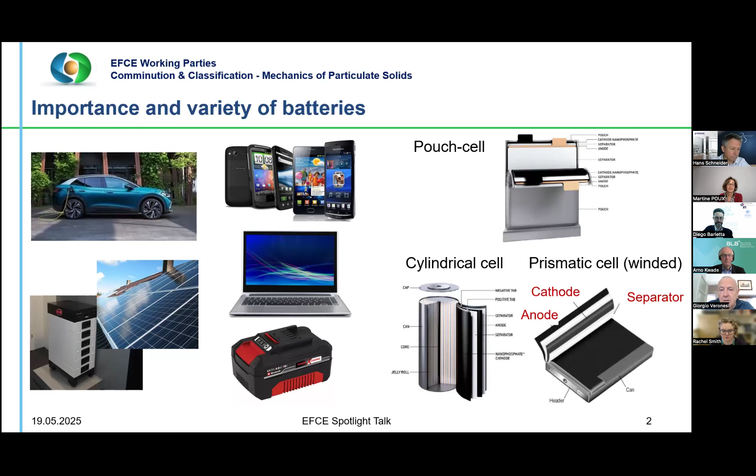Among various battery technologies, lithium-ion batteries have garnered significant interest due to their high energy density and extended cycle life, making them suitable for numerous applications, particularly in portable electronics and electric vehicles. The fundamental operation of LIBs relies on the reversible movement of lithium ions between the anode and the cathode. Let's have a look at the structure of the battery compartment and its main components.

The primary anode material is graphite, typically with a particle size around 20 microns, exhibiting a layered structure that facilitates lithium-ion intercalation. Silicon, with nanoscale particles below 150 nanometers, is explored as a high-capacity alternative. Common cathode materials include lithium nickel manganese cobalt oxide (NMC), often with particle size around 500 nanometers, known for its high energy density, and lithium iron phosphate, which can have varying particulate forms, including nanorods of 30-50 nanometers or larger particles around 3 microns, valued for its safety and cycle life.

Conductive additives are also incorporated to enhance the electrical conductivity within the electrodes. Carbon black forms a conductive network consisting of spherical aggregates with primary particle size ranging from 10 to 500 nanometers. Carbon nanotubes, one-dimensional nanomaterials with diameters of 0.5 to 80 nanometers and lengths of 5 to 20 micrometers, provide efficient electron transport pathways.

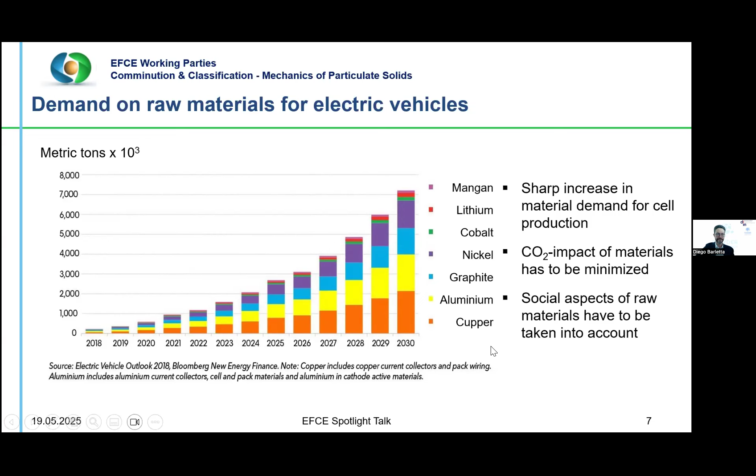I'm sorry for that, one second. It was too fast in clicking.

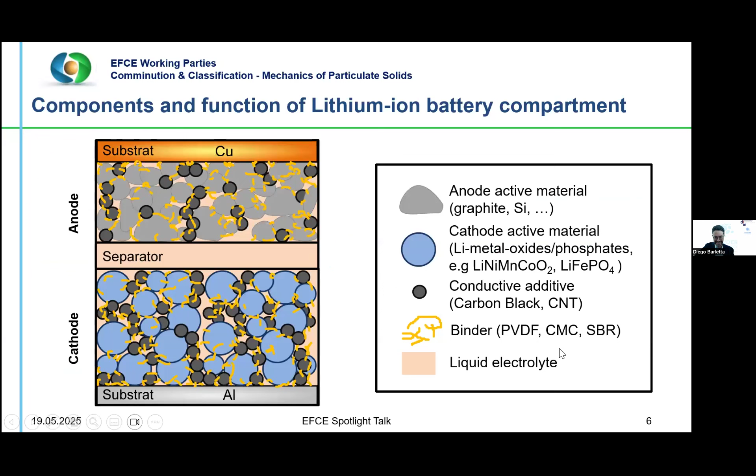Okay, that's it. The development of a circular economy for batteries necessitates research and development in particle technologies across various stages: mechanical recycling of end-of-life batteries and production scrap by optimizing physical processes for efficient material recovery, and hydrometallurgical treatment and reconditioning of spent active material by developing environmentally benign chemical processes for metal extraction and reuse.

Also needed: synthesis of active and passive materials by tailoring particulate properties for enhanced battery performance through energy-efficient synthesis methods; raw material handling and mechanics by addressing challenges in powder flow and processing for consistent electrode manufacturing; and energy-efficient production of tailored electrodes by developing advanced slurry processing and dry coating technologies for uniform, high-performing electrodes with reduced energy consumption.

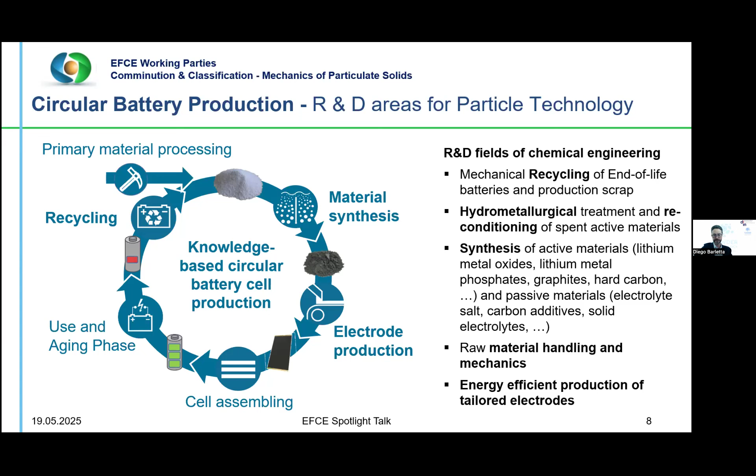So today we will shed light on some of these aspects of particle technology that are relevant to this type of production. And so we have a program of three talks.

The first will be given by Professor Arno Kwade on powder technology-based innovation of modern battery electrode production. The second by Professor Rachel Smith on linking process, structure, and performance for lithium-ion battery electrodes. And the third one by Dr. Hans Schneider on key processing steps in dry battery electrode production, dry mixing, and powder handling for film formation.

You have already seen the structure of lithium-ion batteries with the anode and the cathode, and what is important to say is that this structure is very important for the performance of the battery cells, and I think especially Rachel will talk about that later in detail. But to say that you can see the porosity or the pore distribution, the distribution of the binder and carbon blacks within the electrode, they are very decisive for the electronic conductivity.

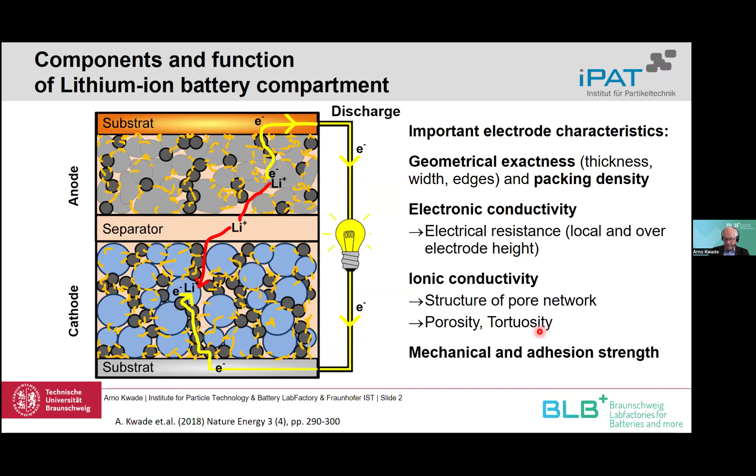And also for the ionic conductivity, both have to be in a certain range so that the cell at the end has good performance regarding fast charging, for example, but also energy density and lifetime, where mechanical and adhesion strength is a factor. So here are some of these quality values like energy and power density, lifetime, safety, sustainability, and costs. These are all goals we have to achieve for modern and innovative electrode production.

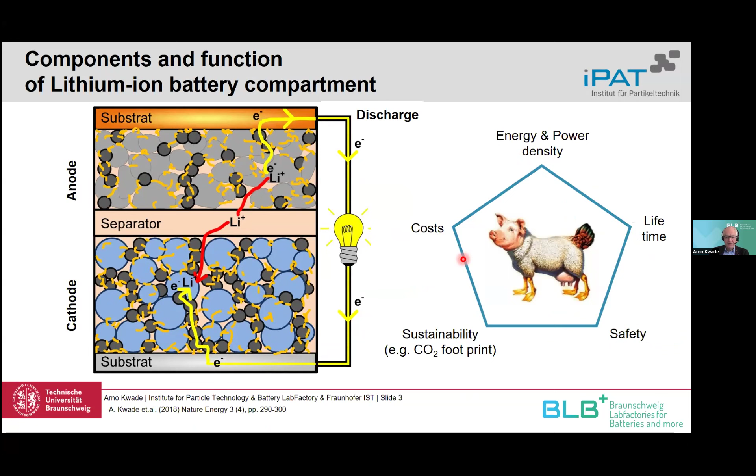In Braunschweig, we are running several labs for this purpose. We started with a big lab in 2014 as a joint lab, working together with 17 other PIs from different fields, from electrochemistry, electrical engineering, up to economics. We are working on the entire topics and have this great production lab with a dry room, which is very decisive and important for producing battery cells.

We also have a diagnosis lab where we dismantle cells and have a closer look at what happens during operation of the cell. We have a new circular lab where we operate a recycling plant and have large facilities also for electrode production. And we will start an education lab for our students, but also for industry, all along this very important circular production, as we call it.

And you see what Diego has already shown, that there's a lot of potential for chemical engineering in the material synthesis, in the electrode production itself, but especially also in the recycling field.

Now coming to my talk in detail, after the introduction I will come to how we can improve the state-of-the-art electrode production, and then I will go over to the dry electrode production, which is also the topic of our third presentation in detail, before I come to a conclusion and an outlook.

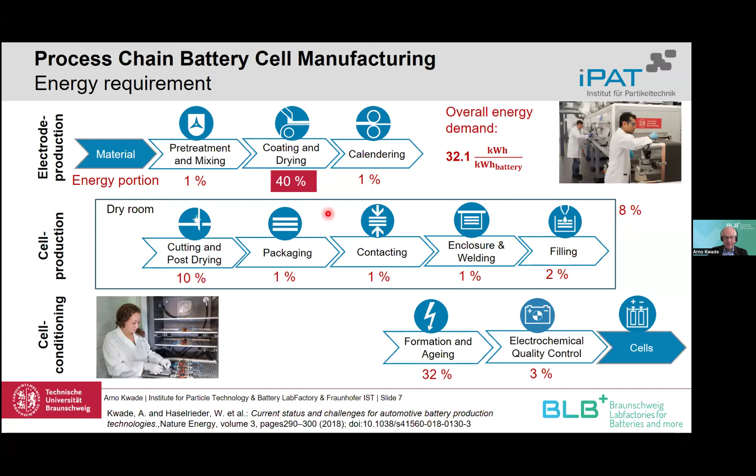And then also the post-drying needs some energy, and also the operation of the dry room. You see that these are very crucial steps, especially for sustainability, so we focus on these steps a lot.

Going a little deeper into the process structure and performance relationships, we can have a closer look into the electrode. You see the electrode can have a certain thickness, density and porosity, mechanical strength, and wetting behavior by the electrolyte - all important for later performance, and it all depends on the particles themselves, but also on the microstructure of our electrode.

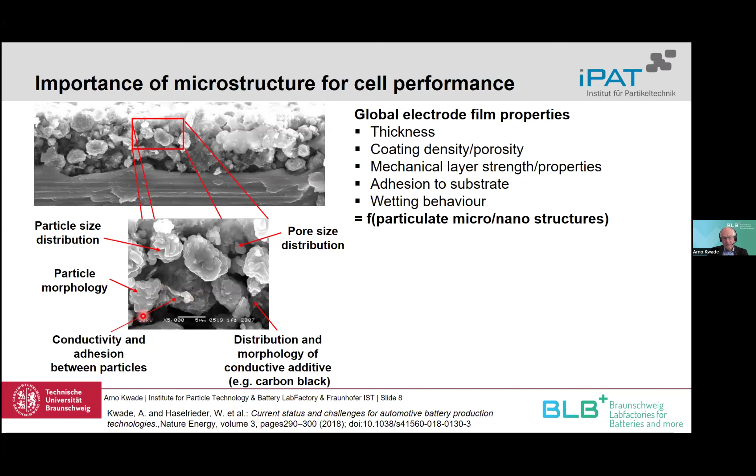Now coming to the process of electrode production, as I mentioned, we have dry mixing, wet mixing, a coating and drying step, and a calendering step.

Let's first look at our quality parameters, the structure parameters along the process chain. For the dry powder mixing and the wet suspension, at the end we can measure particle sizes and particle morphologies as a disperse parameter.

For the later electrode, we can measure the pore network structure, such as pore size distribution. We can also determine the tortuosity, which is the length of a path through the electrode for the ions, and this should be as short as possible.

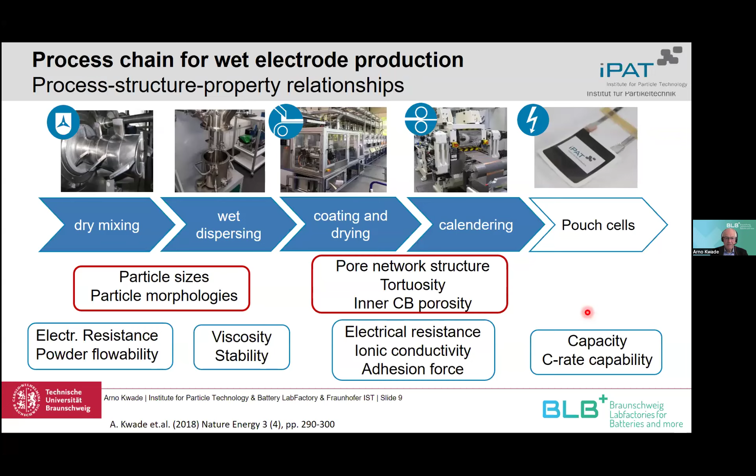And then finally capacity, C-rate capability, fast charging capability, etc. of the cells. So now, focusing first on dry and wet mixing, our task is to disperse the conductive additives. I'll focus here on carbon black, but today CNTs—carbon nanotubes—are almost always included in electrodes too, and dispersing them is also very crucial.

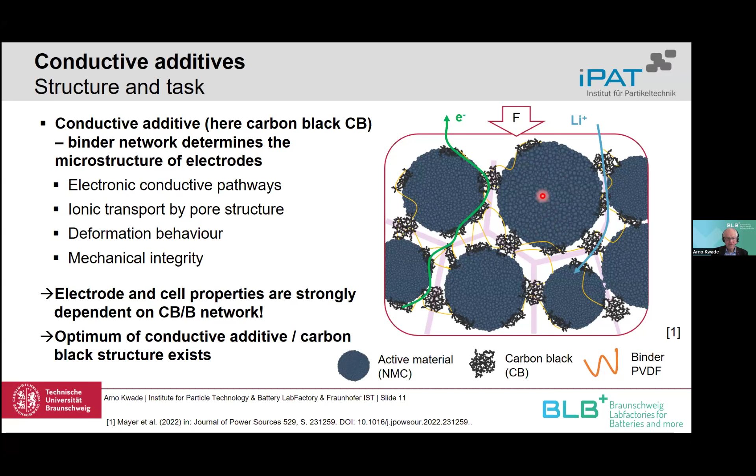As I said, the inner carbon black porosity is a good measure for the structure. It's also the case that the smaller the agglomerates, the smaller the inner porosity, because the agglomerates break where the porosity is largest.

We calculated this inner carbon black porosity using normal mercury intrusion measurements. We could also show that the ionic resistance really depends on this carbon black porosity, and there's a minimum in resistance, meaning an optimum at a certain carbon black inner porosity.

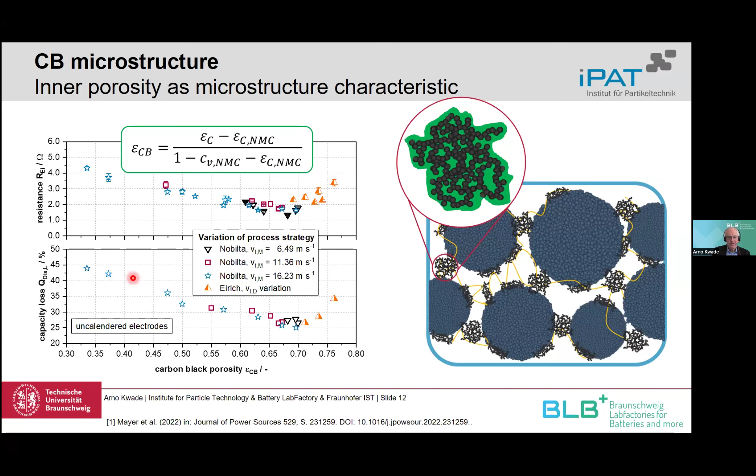But we're looking for another parameter which we can use for quality control during processing, especially during the dispersing of particles. It's not so easy because you have bimodal distributions of the carbon black.

The active material shouldn't change—otherwise you get degradation—so we have to measure the carbon black specifically. We defined a way to measure the carbon black distributions using centrifugation and laser diffraction measurements.

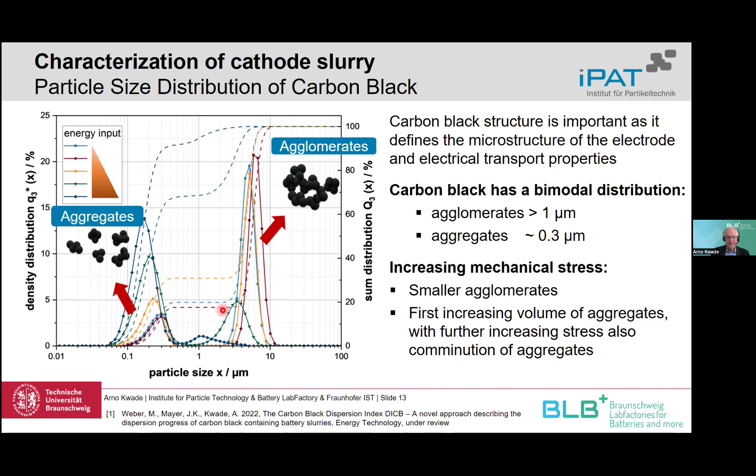We're looking for one parameter that can characterize this performance, and we found that the enveloping surface of the aggregates is a good measure. We can estimate a characteristic value by calculating the relative amount of aggregates—the area under the left curve compared to the entire curve—and the median diameter of the aggregate. We multiply the amount by the specific surface of these aggregates, giving us a measure we call the dispersion index.

And now I want to show how this dispersion index is affected by the dry and wet mixing process.

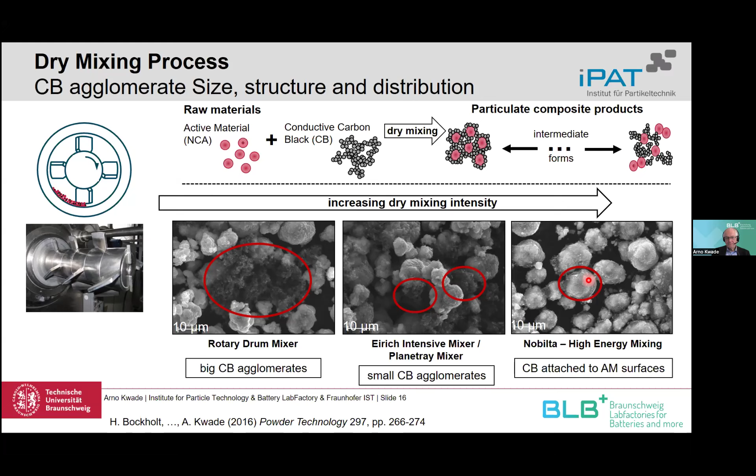If we have a high intensity mixer, then the agglomerates are much smaller. Already the first aggregates are sitting on the surface of the active material particles. In an extreme case, we really coat the active material particles with the carbon black, which is maybe too extreme, but you can see that later. So something in between is what we need at the end.

And also we can reach much higher values, at least in a reasonable time. This is due to the disagglomeration of the carbon black agglomerates into aggregates.

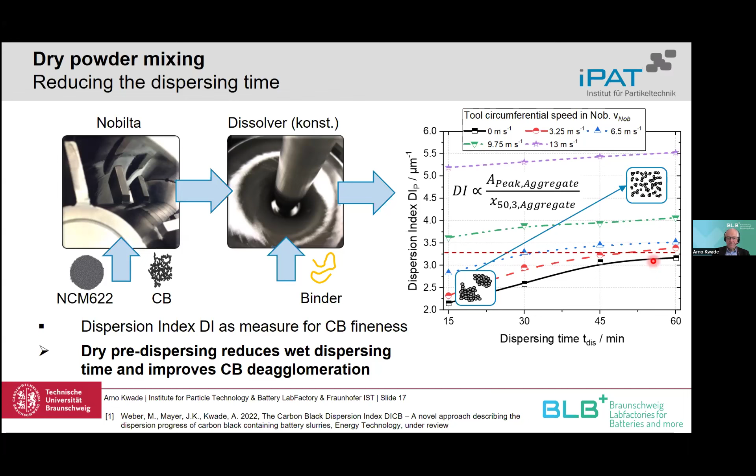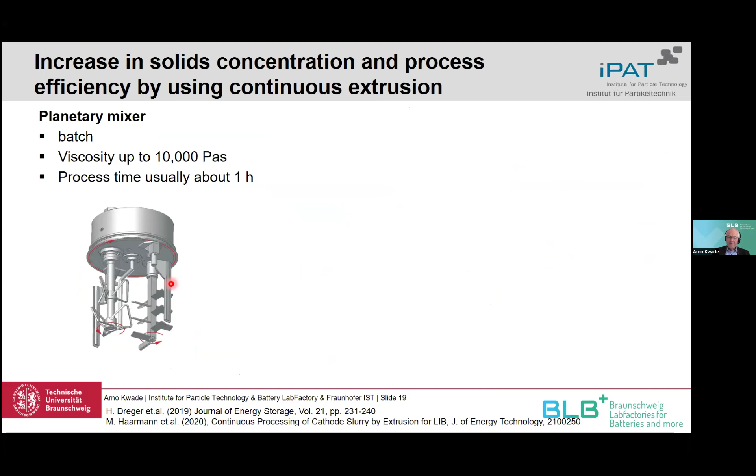For the wet dispersing, typically you use planetary mixers, which have been around since they started to produce lithium-ion batteries, and they are used in 90% of the gigafactories in the world today. But there are other solutions, and the most promising one is extrusion.

Extrusion is a continuous process - we don't have several batches. We can also operate at much higher viscosity. You see here we have viscosity up to 10,000 Pascal seconds, but we can also go up to 100,000 Pascal seconds with an extrusion process. The mean residence time can be very short, which also helps, especially if there might be some side reactions. But we have to control this process very nicely because we can't change anything after the product left the machine.

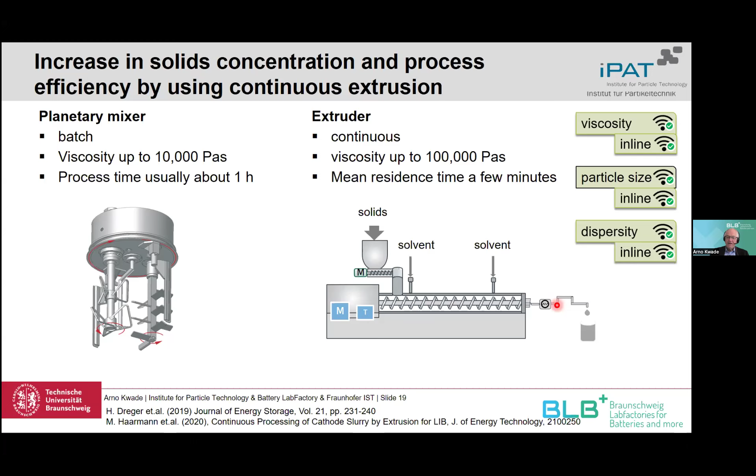Now what happens in the machine: if you look into the screw design, we stress the particles due to shear inside the suspension. We can measure or describe that by the so-called stress intensity, which is nothing less than the shear stress inside our extrusion machine. As a measure of that, we can use the torque or the specific torque of the machine.

Besides that, we have to see how often such particles are stressed, at least in the volumes where we have really high stress intensity, especially where these two screws are coming together. If we multiply both, then we have a measure for the specific energy input into the process.

What we can see is if we have low stress intensity, then we have still a higher number of agglomerates, lower number of aggregates. If we increase the stress intensity with the same comminution or dispersing time, then we have lower and also smaller agglomerates - lower amount and smaller size - but we have much more aggregates formed here.

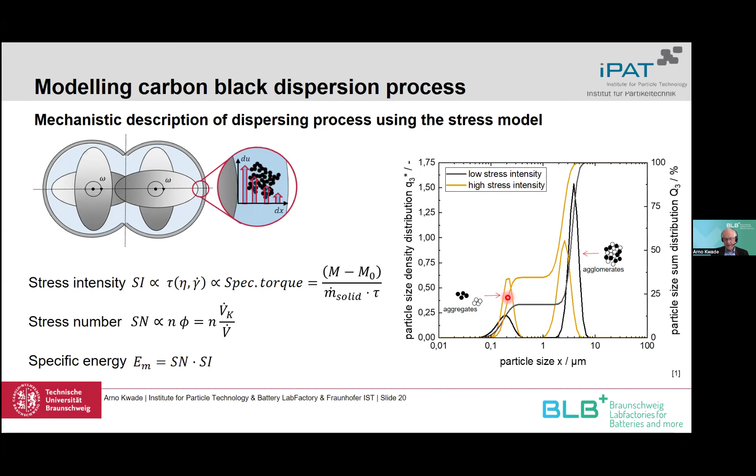Now going to the next slide: if we increase the concentration of our particles, that means we have a high viscosity, very high viscosity within the extrusion, and we have some kneading blocks normally installed in the extruder, then you can see that the dispersion index increases a lot. And we have a really high torque, which then decreases again.

The decrease is due especially to the delamination of the graphite particles. So we have a degradation, which we don't want to see. We can also have this with smaller concentration, but it's only a little bit.

And if we now look at the results, you can see that the results with high kneading, but only 50% concentration, gives us very good or relatively good performance results - that means a high capacity, even at high or reasonably high C rates. 1 C means charging the cell in 1 hour.

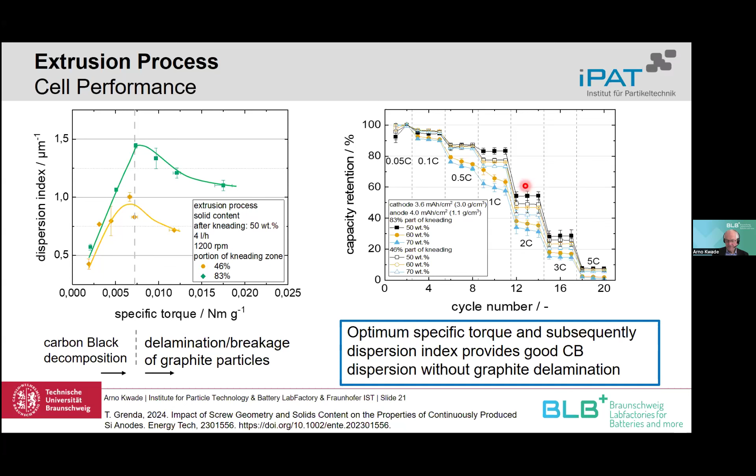If you go to half an hour, then it decreases and so on. But this can also be changed, for example, by the thickness of the electrode or by using more carbon black and CNTs and so on. This is something the companies have to do to find the right performance data.

Now the next step is coating and drying. A lot can be done there, especially to avoid migration, so that binder and carbon black doesn't go to the surface of the electrode. Due to time I cannot go into detail here, but we do a lot of work in this direction.

Then comes the calendering process, which is also very interesting, and we have done a lot of work there too. I want to show only one result. This calendering is really a mechanical compaction of the electrode, to come from bigger spaces between the particles to smaller ones, and to have less volume for the same capacity. That means we can increase electrode density, and by that, the overall energy density.

We can improve charge transfer, especially the electronic transfer, though the ionic transfer usually gets worse. It improves the mechanical behavior—the electrode gets much more elastic, which is good for handling. We can smooth the surface and control the thickness, done by the force coming from the roller acting on the electrodes. Rachel will also talk about this a bit later.

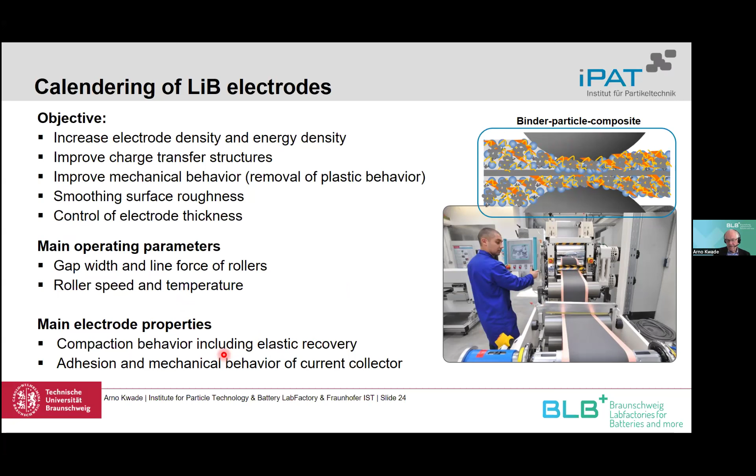There's also elastic recovery, as you may know from tableting, and this elastic recovery hinders our calendering process. One result I want to show relates to what I showed regarding the dispersion or comminution process: the dispersing of the carbon black is really decisive for the calendering process. For small dispersion indexes, where we have a lot of agglomerates, the line load needed is much higher to reach the final result.

This is especially due to the elastic recovery, which is much higher. Then we go down to a smaller line load at a dispersion index of about 4. If we increase the dispersion index further, having almost only aggregates, we again need a higher line load against the elastic recovery, so that we come to the final density, in this case 3.2 grams per cubic centimeter. This was some insight into the production of wet produced electrodes.

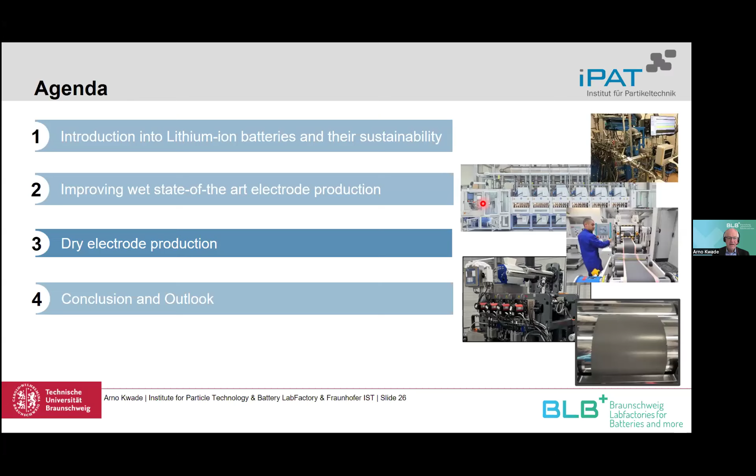Now I would like to come to the second topic of my talk: dry electrode production. As I said, we have to move toward more sustainable production of electrodes, and one measure is to change from wet to dry coating, or semi-dry. I will show you how that works. This also shortens the process chain.

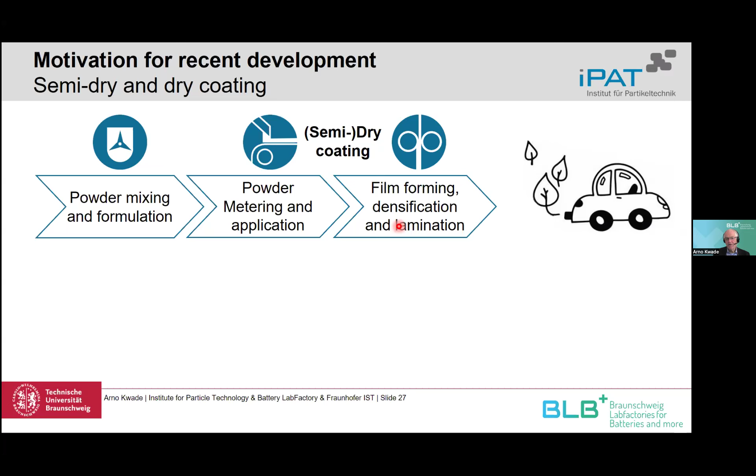We have a more or less dry mixing, then the dosing of the powder and film formation—no drying and no calendering, because the film formation, as you'll see, is at the same time the calendering process. So we have a relatively short process chain. We can also avoid critical solvents, because for example for the cathode material we need NMP as a solvent to work with PVDF as a binder.

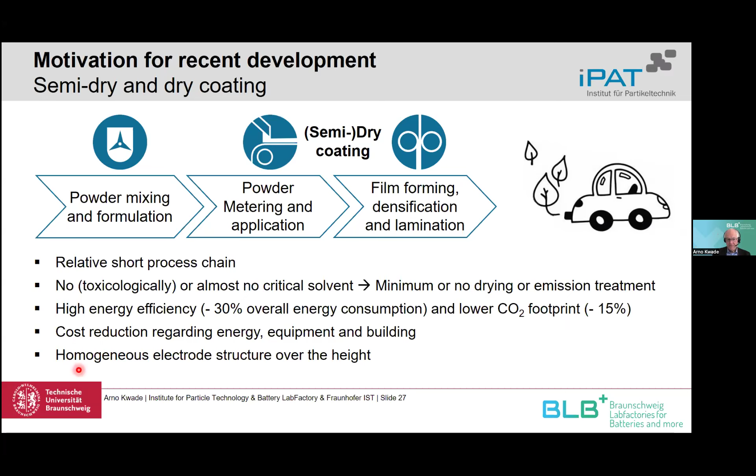We have a much higher energy efficiency, minus 30% of the overall energy consumption. You saw 40% was for coating and drying, but now we need only 10% instead of 40. The CO2 footprint is also much better, and we have a cost reduction, especially because the buildings can be much smaller. Currently, a coating line needs a building about 100 meters long—really big buildings—and this can be shortened to maybe 10 meters with the dry coating process. We also have no migration anymore.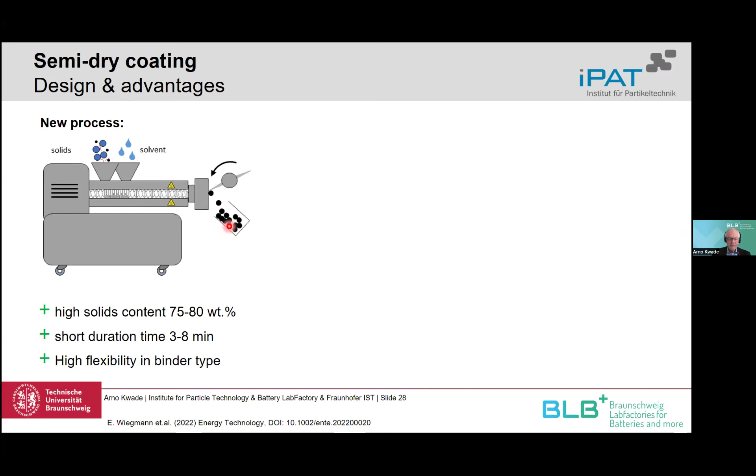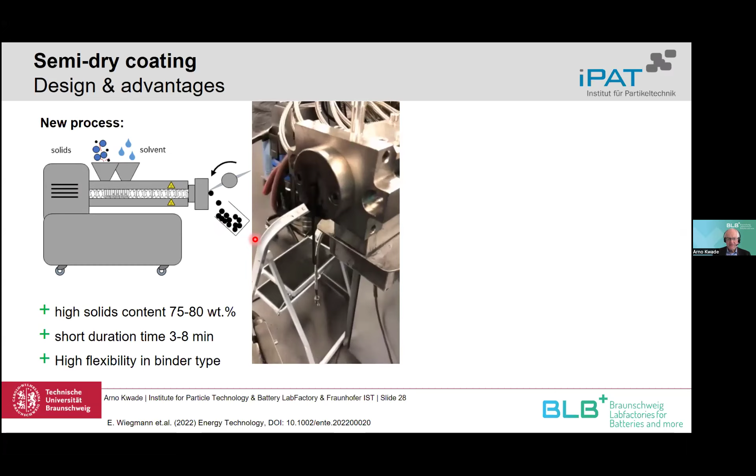To start with the semi-dry coating process, something we developed at our university and also patented: here we produce, by the extrusion process, not a suspension but really granules, which are soft and deformable. Here's a small video showing the cutting of our extrusion strands, giving us nice granules, which we then dose onto a calendering machine. On the calendering machine, we can form a nice thin film with really good properties.

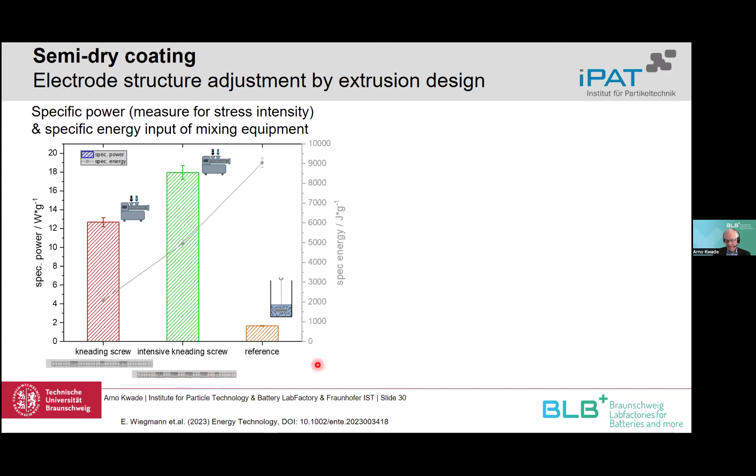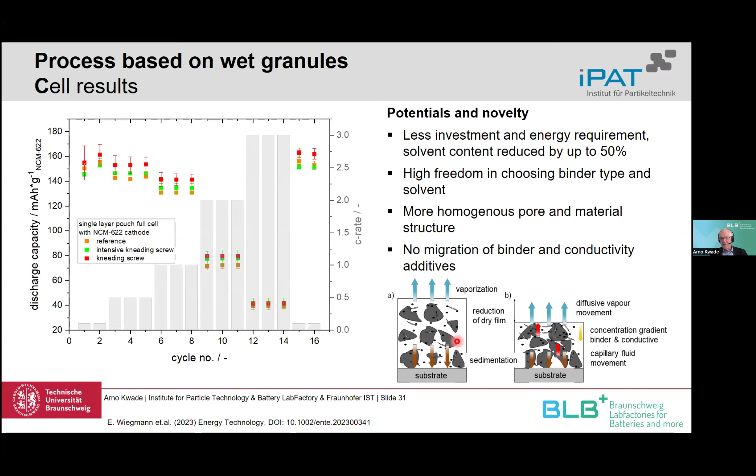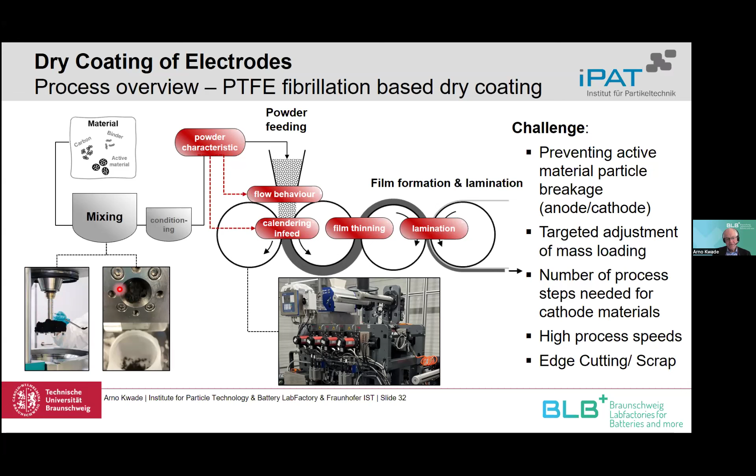So it sounds simple, but it's not that simple because a lot of parameters affect this process. One is the mixing process. We can do it again in a dry process with high intensity mixers from Zeppelin, for example, which you'll see later, or we can also do that with an extrusion process, like I've shown for the semi-dry processing. But I don't want to focus on that today more - I want to focus more on the film building and the effect of the particles.

And the fibrillation of the PTFE depends a lot on the mixing process. For example, in extrusion you can have much smaller and shorter fibrils if you want. In a dry or batch process, usually they are a little bit larger. But there's also an optimum of length and thickness of these PTFE fibers.

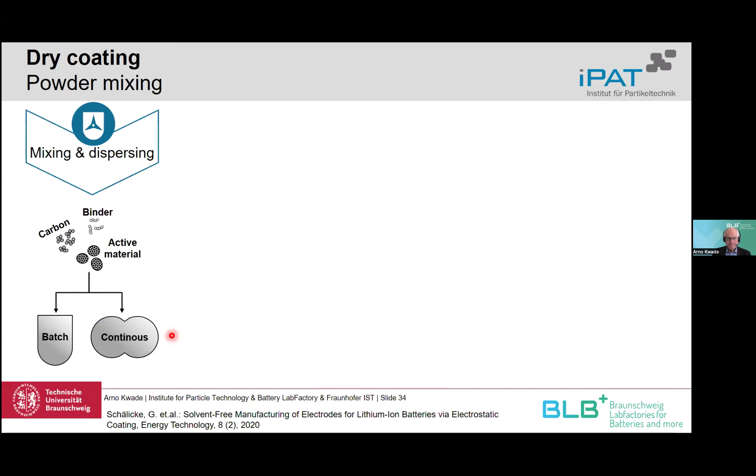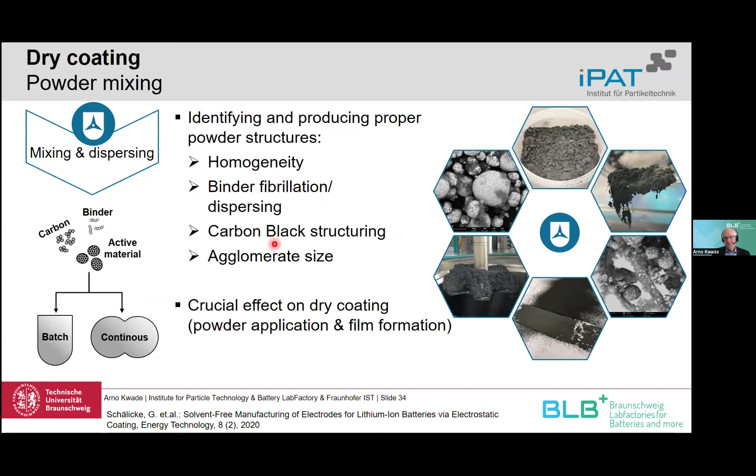Now, this mixing process, as I just said, especially decides or shows the binder fibrillation and determines the binder fibrillation, and also structures the carbon black. It's important to say that in this case the dry process has to do everything - there's no wet process, as I've shown before, that can do more work so you can finalize your structure. That has to be done really during the dry processing, and this has a crucial effect on the coating, but also on the later electrode performance.

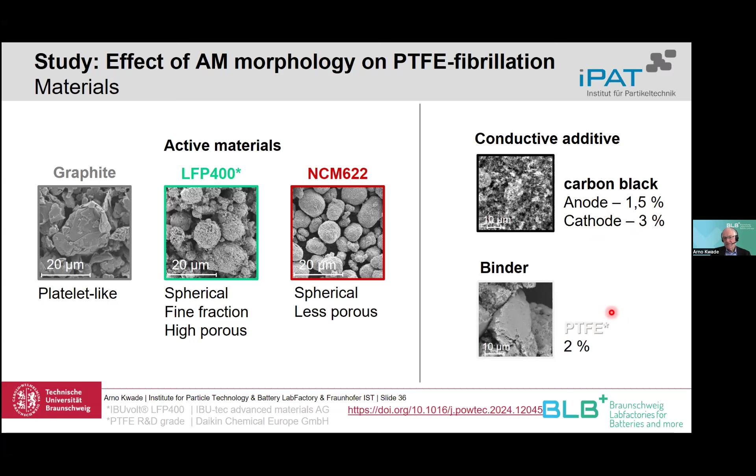And we use some carbon black for an anode - it's 1.5%. For the cathode it's 3%. And in any case we had 2% of PTFE. Now for the mixing process: we first had a starting homogenization of our material at, let's say, high intensities with high power input, kilowatts - so it's the power input.

Then there's a softening phase, and then we come to the fibrillation. Here we add the PTFE, and then we have the first fibrillation of the PTFE, and we take a sample. We have another 10 minutes fibrillation, and afterwards we take sample 4. Then we have a cooling down period without mixing, and a final homogenization at lower temperatures for the final powder properties.

What happens regarding the size distribution, for example with graphite, at the beginning without PTFE there's not changing a lot. It shouldn't be that there's a change, but after adding the PTFE, fibrils formed, and this formed fibrils then also form agglomerates or granulates inside the mixture. This is seen here, and with increasing fibrillation there's an increase in the granulation size and also amount. And after the final...

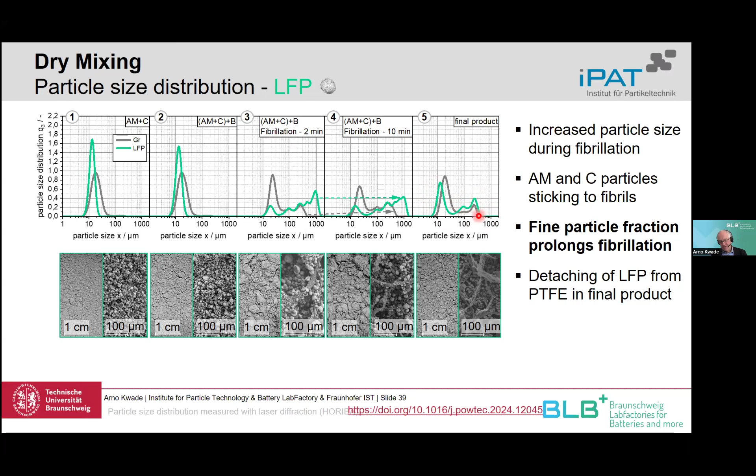So these are the original primary particles which are not granulated, and these are the granules. So we have a mixture out of, let's say, free particles and particles which are detached, which are sitting on the fibrils.

So these are then for the NMC, it's the same. It was very similar to the LFP. And you see that with the graphite, the PTFE slides more than it fibrillates, because graphite has really low friction. And LFP has a fine particle content, which is still there also after fibrillation. And we have a fast process here also for the NMC.

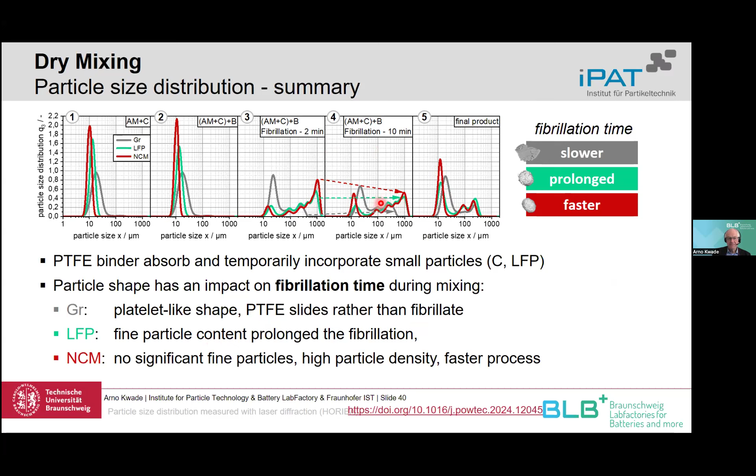What happens now with the properties of our powder, you see, for example, the bulk porosity first increases after fibrillation because you get agglomerates. You can think about that, and after further fibrillation, it changes a little bit, maybe decreases slightly, but there's no big change anymore.

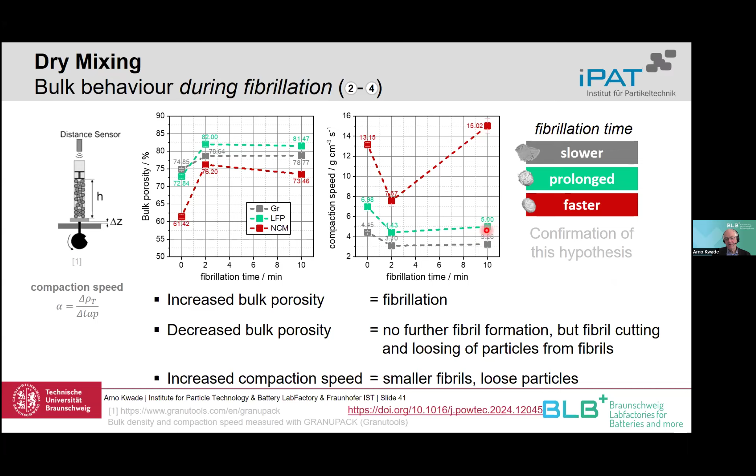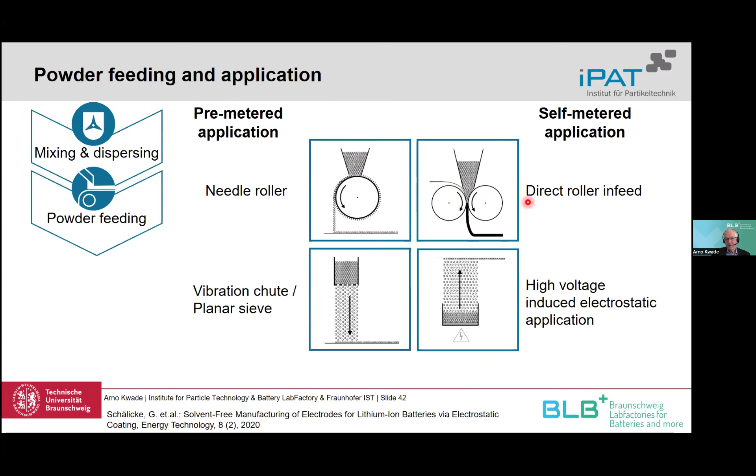Now coming to the dosing process, which is also shown by Schälicke. You see we have maybe a pre-meter dosing, what is not so typical today, but it's also direct roller feeding, which is the most common one.

And what I wanted to show you here is that we have a two-roll calendaring process, for if we dose it onto the current collector, or we have the several steps through the calendaring machine.

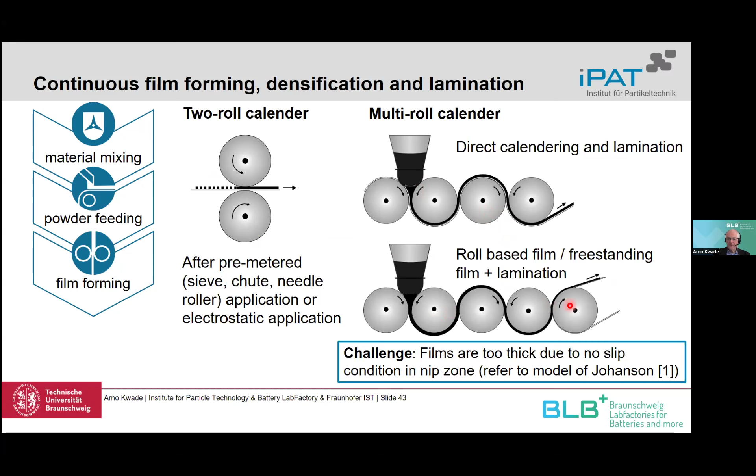And I think there are two production processes which are typical. That's the Maxwell process, where we have a freestanding film or roll-connected film, and we need several steps to come to the right thickness, and then we transfer it onto a substrate.

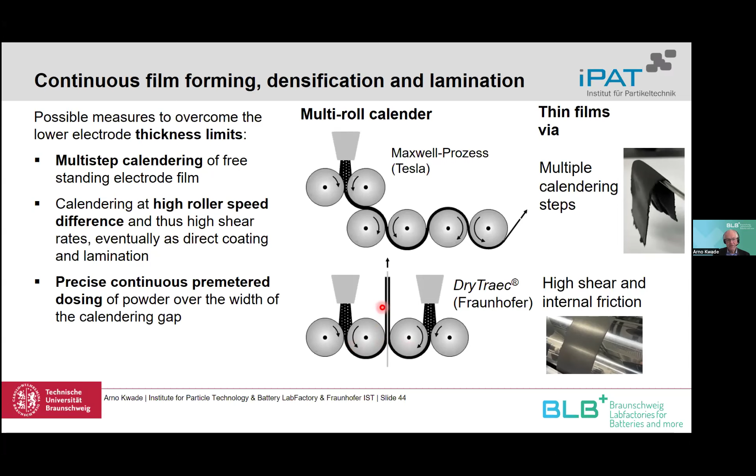And there's another DryTraec process where we have a high differential speed of the rollers, and by that we come down to very thin layers already, and then we can directly laminate it to the collector. To show how that looks like, you have the powder here, you get a sheet, and by several densification steps, in this case 3, we get a nice film, which is really mechanically stable and can be then transferred further. The question is how we can describe that.

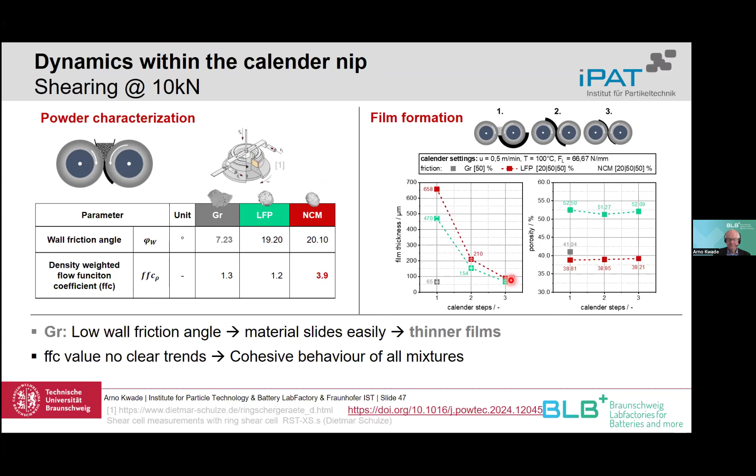A much better measure is the uniaxial compression. What I want to show here very shortly is that with this measurement, you can predict almost, if you know the line load in the calendaring machine, what will later be the porosity of your layer.

What is shown here—my computer is very slow at the moment, but you can maybe see where the straight line goes down. That is what we get at the end.

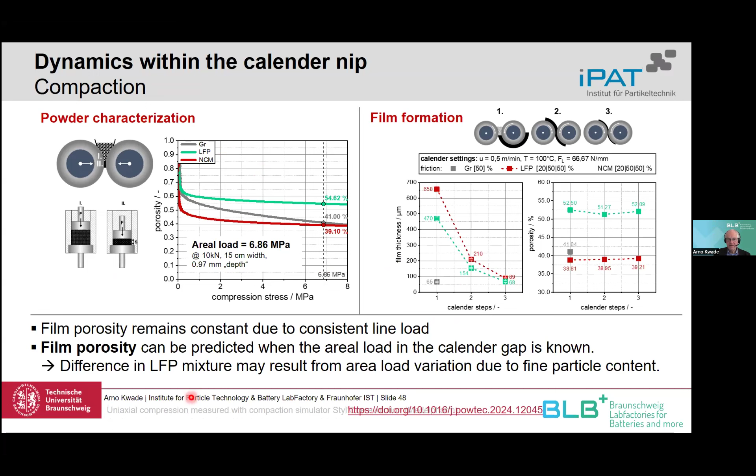Now coming to the conclusion, I hope I could show you that we have material, process, structure, property, function, which are really decisive for the later performance of the cells. We need energy and cost-efficient production processes.

We have to model and predict the input of the conductive additive structure. And what Rachel will show is how we should develop digital twins of the process, and also how the structure determines the later performance. And very important, what Hans will show is the handling and dosing of dry powders for the semi-dry and dry processing of all our electrodes.

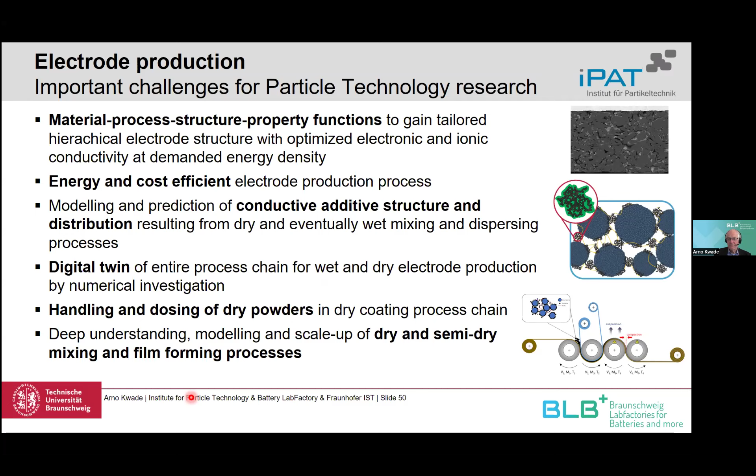I think there are a lot more topics for chemical engineers too—the synthesis of the particles. I think we can do so much there in this field. Then also, if we come to solid state electrolytes and solid state batteries, we have no liquid electrolyte anymore. So even more particles and even more mixing, and the structure is important.

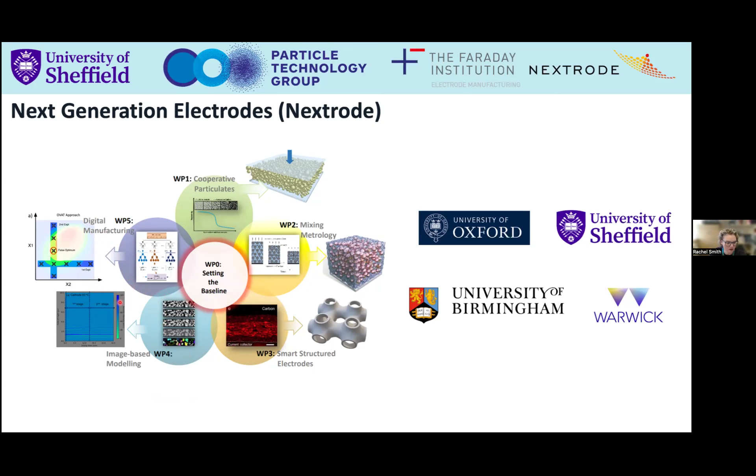So the work package 1 that I was speaking about, we have cooperative particles. We're looking at lots of different angles on the particles that make up an electrode.

And as Arno spoke about earlier, there's 3 primary ingredients, you could say, in an electrode. Now, I'm not saying there's only 3 ingredients. There's lots of other things that go into an electrode, depending on what you're trying to achieve. But the main ones are we need the active particles, which store and release the ions of interest, and in this case, it's lithium.

We have the carbon or other conductive material, right? So it's often carbon, but not always. And what that does is conduct the electrons throughout the battery electrode. And then, of course, we have a binder, and that binder needs to join all the particles together.

When the electrode eventually goes into a battery, of course, we have the electrolyte, okay? And the electrolyte is what the ions travel through to get between all the different active particles.

So we're looking at this from lots of different scales. At the bottom scale, we're looking at particle scale design. And this is where we're trying to look at, can we make particles that will work better in an electrode from a particle scale, from an individual particle scale?

And some of that is about, can we make effectively the correct mixtures and the correct structures that will make the downstream processing much easier for us of electrodes? And that's looking at doing this for both dry electrode manufacturing, which Arno spoke about towards the end of his talk, and also the traditional wet electrode manufacturing when we make a slurry.

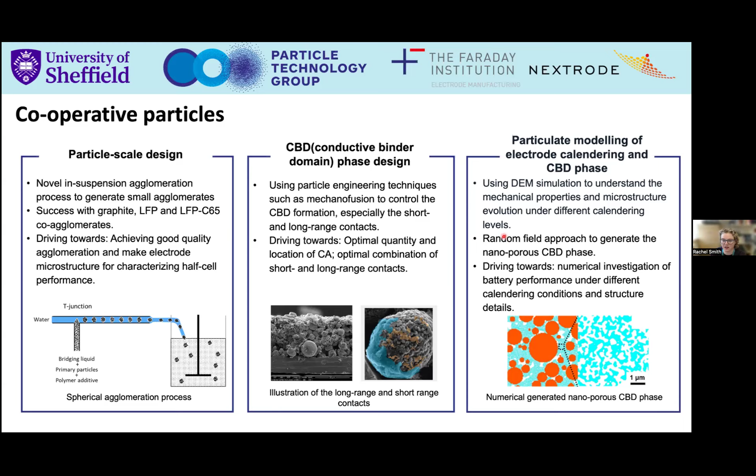So if I take us through, now I'm going to do this very briefly, just a reminder. This is a very basic breakdown of the electrode manufacturing process in a standard slurry process where we mix all the particles into a slurry.

So here we have our dry powder mixing, which is not always—you don't always have this in every process, but as Arno mentioned, it can be very beneficial occasionally to do that. You then take that into the wet powder mixing, so then we add our powders and turn it into a slurry with a solvent.

We coat that onto a film. We then dry that film, and as everybody knows, that's quite expensive, drying that solvent off. And then we go through this calendaring process, which is effectively a compaction step.

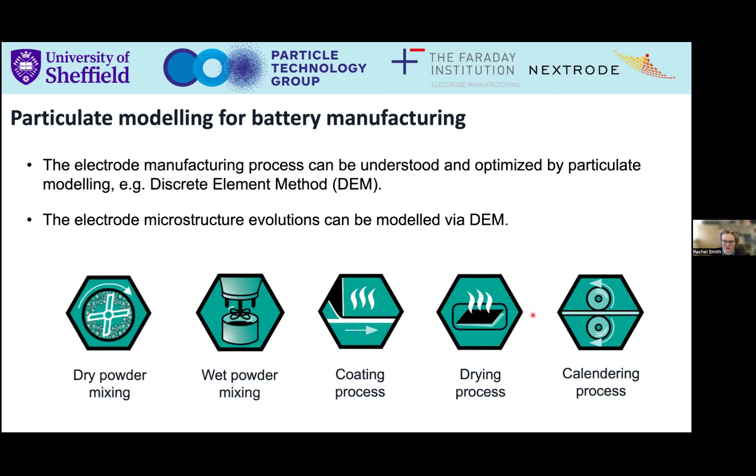As Arno discussed, we're taking what is a relatively porous structure and reducing that porosity. Reducing that porosity is very important for us, because it brings all the active particles closer together, making the distances between them smaller. We're potentially reducing the distance the ions have to travel, not necessarily, but a really big thing is that we're bringing the carbon or other conductive particles closer together, which means it's easier for the electrons to travel through the electrode.

So we know that high calendaring levels can improve the volumetric energy density, but it does increase the diffusive resistance. As we squish the electrode, we're making it harder for the lithium ions to travel through because we're reducing the space available for the electrolyte, and we're increasing the tortuosity, which Arno spoke about earlier. So we have this balance between improved energy density and increased diffusive resistance.

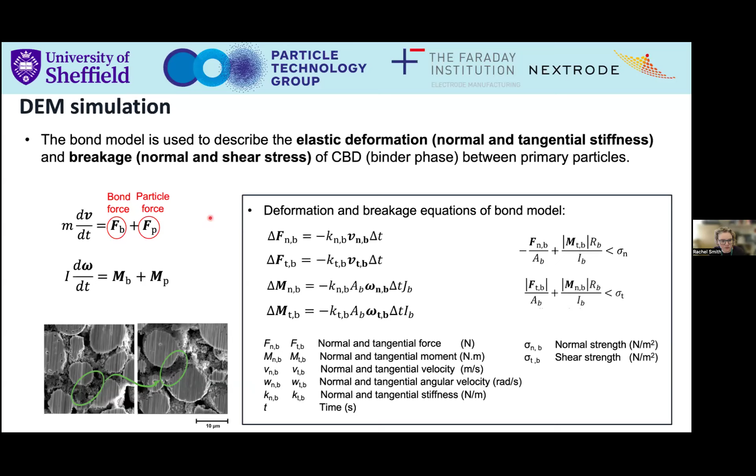In order to apply this technique, we first have to understand what structures we have at the beginning. So we used tomography scans, and we found some very nice databases of scans of electrodes. We segment the image, turn that into a binary image, and then we replace each of the particles in our tomography scan with a spherical particle. The reason for that is spherical particles are by far the easiest type of particle to use in DEM simulations, but we're not relying on that alone. I'll show you later how we've also double checked our assumption that that is okay.

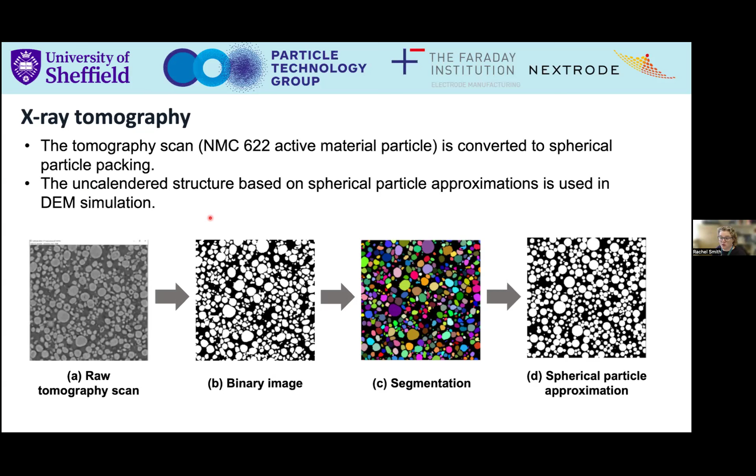We take a tomography scan of a pre-calendered electrode and a tomography scan of a post-calendered electrode, and we see that change in the microstructure. We captured that here by using the porosity of the structure. So we ran simulations, and we got quite reasonable agreement between the porosity of the structures and the compaction pressure in the electrodes.

Of course, we need to do some calibration here, since some of the parameters in the DEM simulation are not well known. But what we find is that if we keep those parameters constant across all the different compaction pressures, this is the result here. So we're quite confident now that our model is giving us a good result.

The other good thing we can find from these DEM simulations is that not only can we study the compaction of the entire electrode, but we can understand the individual stresses at very small scale within the electrode. In the future, the idea is that we'll be able to use this to predict whether particles are going to break under different compaction loads, which is quite difficult to predict without doing any kind of simulation, because it's hard to predict the individual stresses inside this 3D structure. That's something we're quite interested to do in the future.

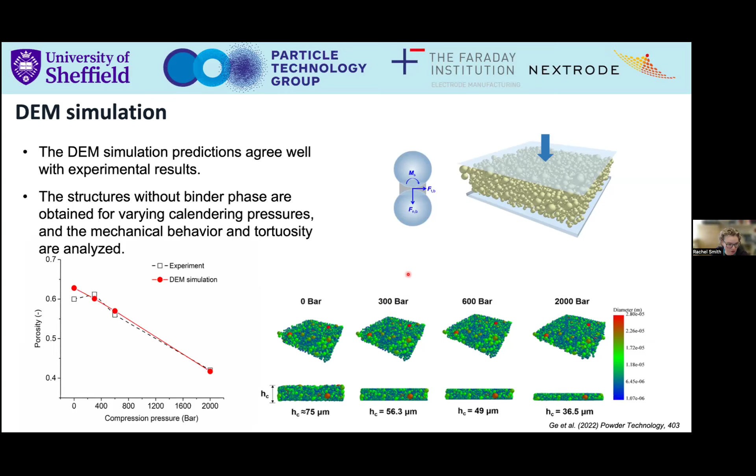We've effectively made all these different structures with different porosities, and we can look at what is the minimum path length in different directions. That minimum path length is really important for understanding our lithium ion transport - how it's going to be able to transport around these particles. As we compact the electrode, typically our lithium ion transport becomes more difficult.

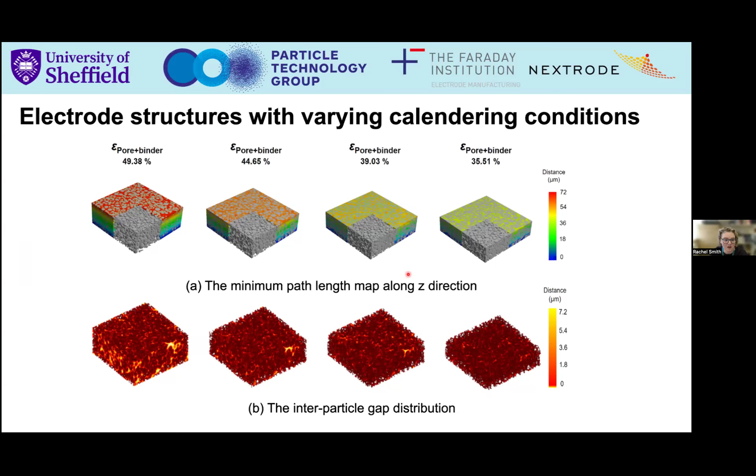We can also look at interparticle gap size distribution. One of the beauties of this type of technique is that we can study a whole range of different things. We can also look at what we call tortuosity - how winding basically are the paths through the porous structure. The reason we're so interested in it is that we're interested in lithium ion transport, and the lithium ion has to travel through those tortuous paths.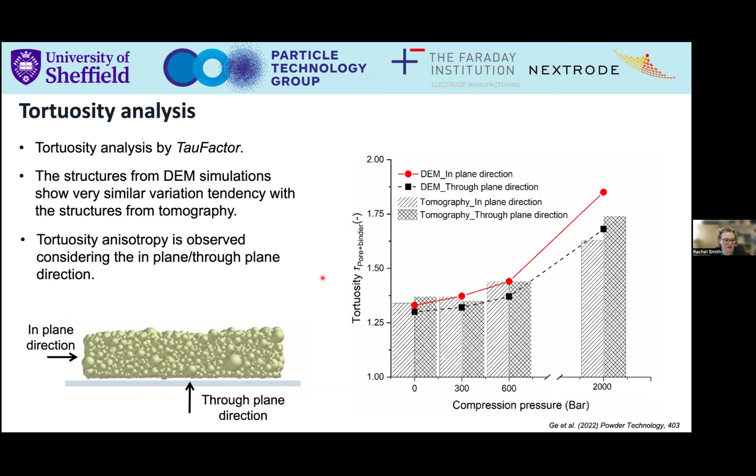So now we've gone through and validated a way to understand the structure of an electrode going through the calendering process. Obviously we haven't done this for lots of different materials, just for an individual case, but we've got reasonable confidence with that case now. The next level, of course, is understanding how does that affect my electrochemical performance - this structure only matters insofar as I'm capturing the performance of the electrode.

So we've proposed this digitized workflow and published it in 2023. Basically what we're trying to do is create a workflow for people to follow, including us, which looks at the way we can benchmark or compare our model with our experiments, and basically validate our model.

So here we have our physical methodology: we create our electrode, we compress it, we characterize the structure of it using X-ray CT, and then we do electrochemical testing, which gives us performance. But when we do our virtual approach, we can take our X-ray CT and import that in. We also do the compression, look at our structural evolution, do our electrochemical testing simulations, and then do that comparison.

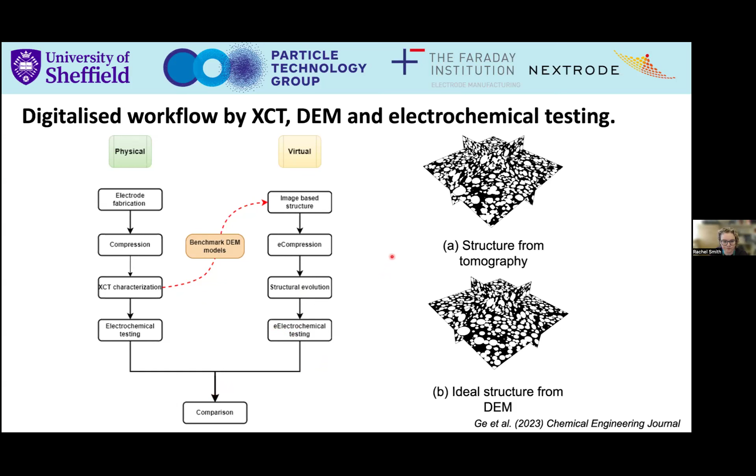So we did mention earlier that we double checked this by making a sphere approximation. Now this works really well for some things, but it doesn't work great for everything. We had a good feeling it would work well for these NMC particles because they're quite spherical, but we wanted to make sure.

So we took the tomography scans and said, okay, let's say they're all spheres, and then let's say they're all ellipsoids instead, which have that degree of freedom to change the aspect ratio. We replaced each of the particles with ellipsoids in DEM and ran our DEM again. What we found was that when we replaced our particles with ellipsoids, if we look at our pore volume distribution, actually the spheres do a better job for us in this case than the ellipsoid approximations.

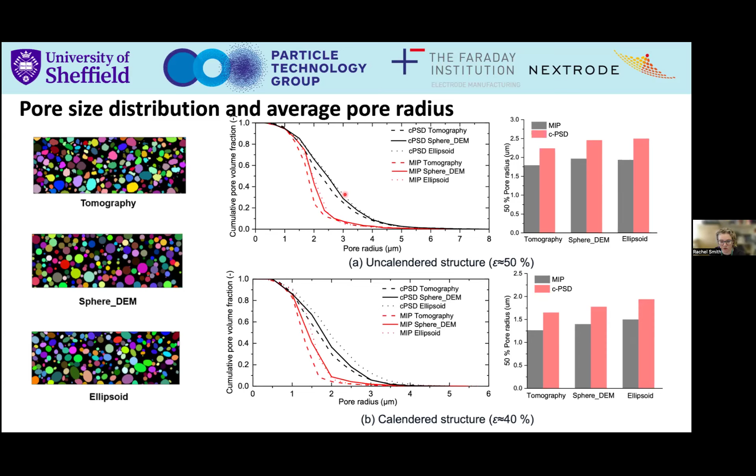Now there's not too much difference, it's quite close. But that said, we found that the spheres work better for us, and we're very happy to hold on to that. That was validating for our methods, basically.

Now I mentioned electrochemical analysis. This is a tool that's been used for a number of years. We work together with our friends at UCL and Oxford on this technique. Basically what this means is if we have the structure of an electrode using existing finite element analysis methods, we can predict the electrochemical performance of these structures.

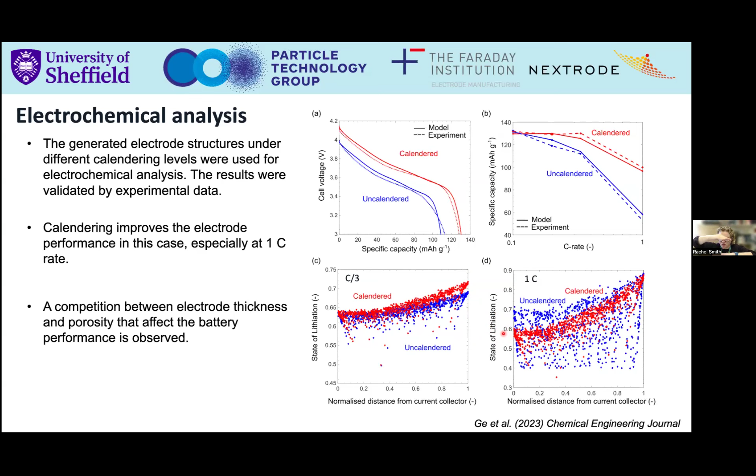And then, of course, we can look at different calendering levels here and the state of lithiation between calendered and uncalendered electrodes. And as you might expect, as we calendar our electrodes, we bring that distribution of lithiation in tighter. So an uncalendered electrode has a much larger distribution, and when you calendar it, you bring that distribution in tighter.

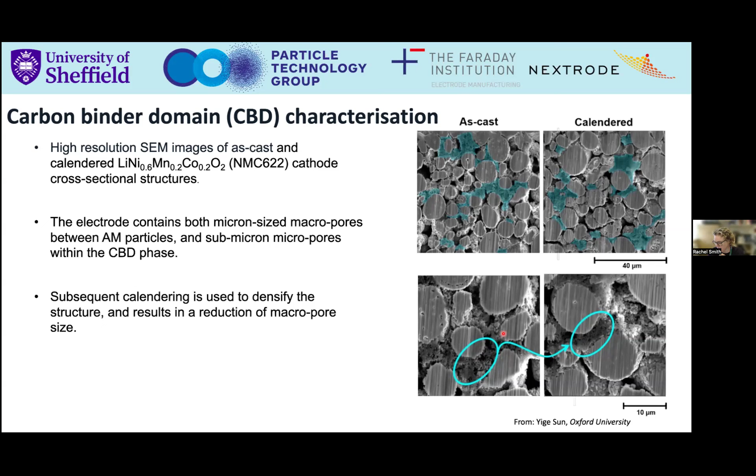So when we look at our carbon binder domain characterization, we see that we have macropores and micropores, and we know these are very, very important. Understanding the contribution of the micropores and macropores to the electrode performance is really important. So we came up with an idea, rather than just doing our electrochemical simulation, to look at how important these micropores are to the performance of the electrodes.

And of course, we can do that digitally because we can use algorithms to create these micropores of the CBD structure inside the electrode, and we can change the relative amounts of micro and macropores while keeping the total porosity the same. So we have that power with the computer.

So we looked at experimental data here, these dotted lines, and the simulation data are the squares. What we attempted to do is create bimodal distributions of micropores and macropores. You can see that these aren't perfect replicates, and what we're seeing here is that we're overestimating, I guess, the sharpness of these peaks in our simulations.

But we're not too worried about that because what we're trying to do is, rather than trying to perfectly replicate experimental data, we're trying to investigate the role of this microporosity. To be honest, it's not too bad when you think about it. The disagreement between the experimental and the simulated data is not too big.

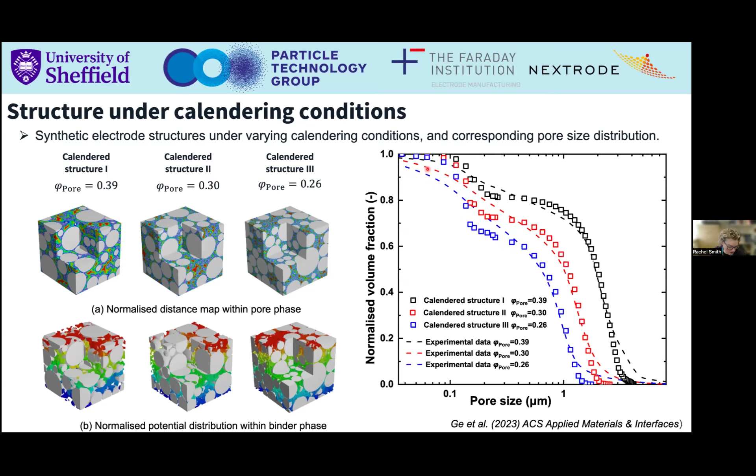So we increased our microporosity, and what we found was that when we increase our microporosity, we massively increase our specific capacity under certain conditions. And so this was a really important finding.

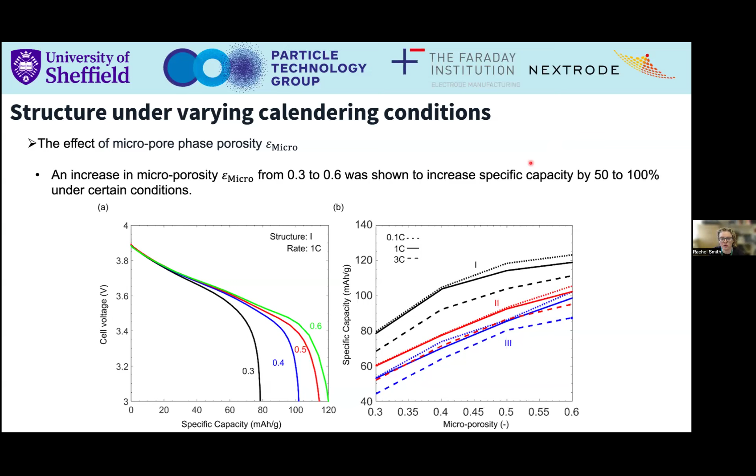What this means is that if in manufacturing we can change our microporosity inside the electrode, we can start to really control the electrode performance, or at least influence it substantially without putting more active particles in there. That's the important thing here, we're trying not to have too much more active particle in there. That's the expensive part of the electrode in terms of materials, very much the active particles that store and release the lithium.

Now we come to our machine learning framework, and the whole point of this is that X-ray tomography is very, very expensive to do experimentally. Making electrodes is expensive to do experimentally. Sadly, DEM simulations, which we have been using, are expensive to do computationally.

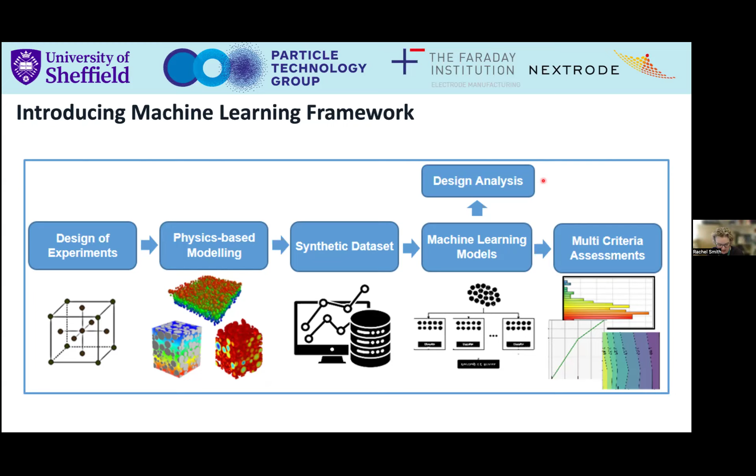What we want to do is not have to run our simulations every time to generate a huge data set. We want to be able to use machine learning to understand all the different effects of the different parameters so that we can design electrodes without having to run thousands of simulations and thousands of experiments with thousands of CT scans. And so we've started working in this area, working with our friends at Warwick.

So in order to do this work, we had to generate quite a lot of different structures, but we only did about 45 DEM simulations. That's probably about 6 months of simulations, I would say. The idea for doing this is to effectively have a model that can predict almost any condition within the boundaries of what we have simulated.

I'm going to go through this reasonably quickly because of time, but we tried to vary many different parameters. We varied the distribution of the particles. On the left, we have our original distribution, which is basically a replicate of the particle size distribution of experimental particles that we had.

We then deliberately, by maintaining the same average particle size, manipulated that distribution to give us a bimodal distribution, so that we have a lot of small particles and some big particles. And then we also deliberately manipulated it to give us a much tighter unimodal distribution, so all the particles are close, there's not a big variation in the particle size.

We also changed our cumulative pore volume fraction, so basically calendering to different levels. And we changed our pore size distribution, basically the fraction of the pores taken up with micropores as opposed to macropores. And so we did all these manipulations.

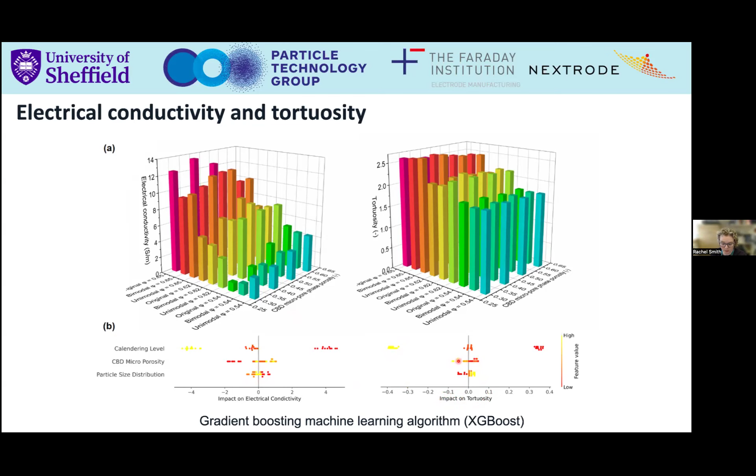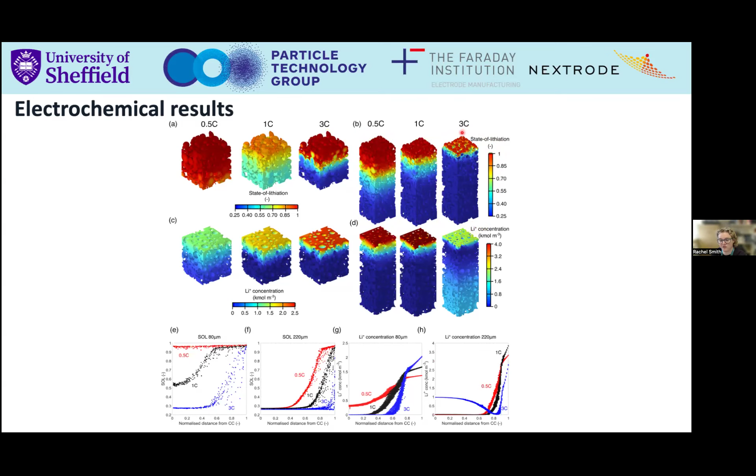As we go for a thick electrode at high C rate, of course, we get very, very poor lithiation across the entire electrode. And so what we're then trying to do is understand, okay, can we capture the battery capacity?

And the beauty of this machine learning analysis is that it allows us to effectively understand the contributions of all these different factors. If we understand the contributions, then we can start to try to design electrodes for a specific performance, and that's really important. Every battery has desired performance targets.

A car often needs, if you want to have a high performance sports car, it needs high power. It has high power requirements. You need to be able to get that energy out really quickly. That's different to the battery in my computer, which doesn't need that high power relative to that car.

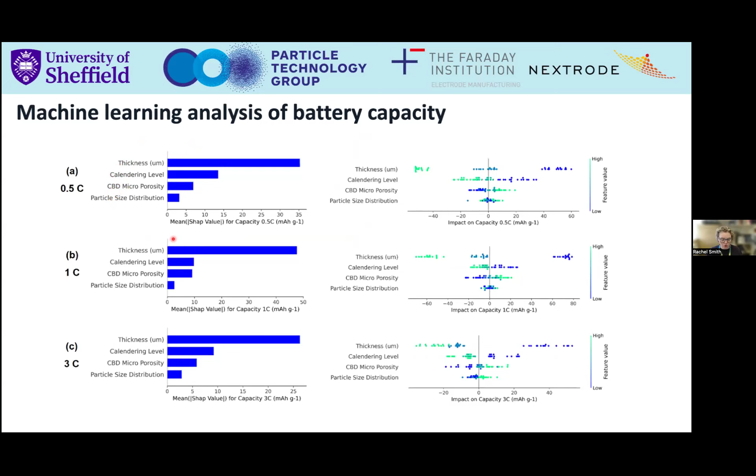So here we're looking at all these different variations: microporosity, particle size distribution, calendering level, and thickness. The important thing here is that we're able to quantify the contributions of each of these towards our electrode performance.

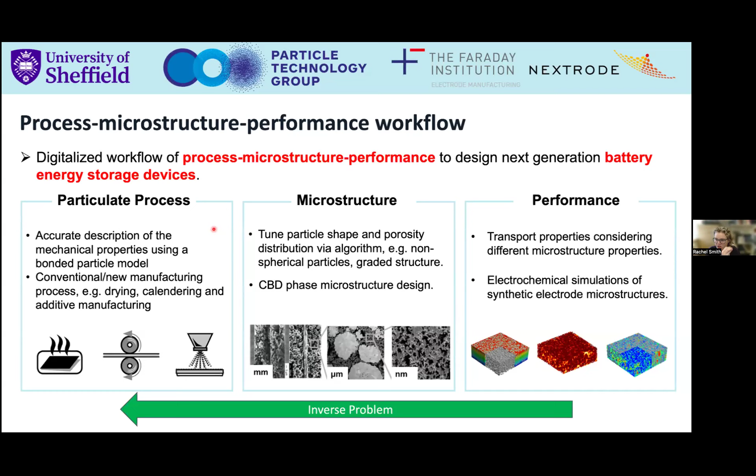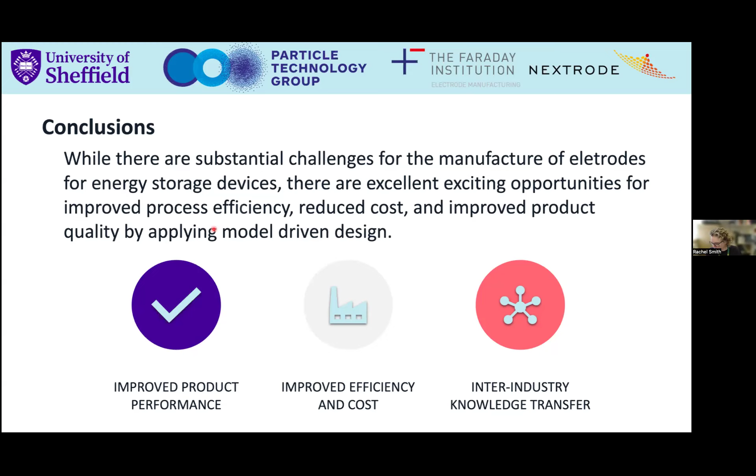So in conclusion, there are substantial challenges for the manufacture of electrodes, as Arno has brought up, but there are really exciting opportunities here, I think, for improved process efficiency, reduced cost, and improved product quality.